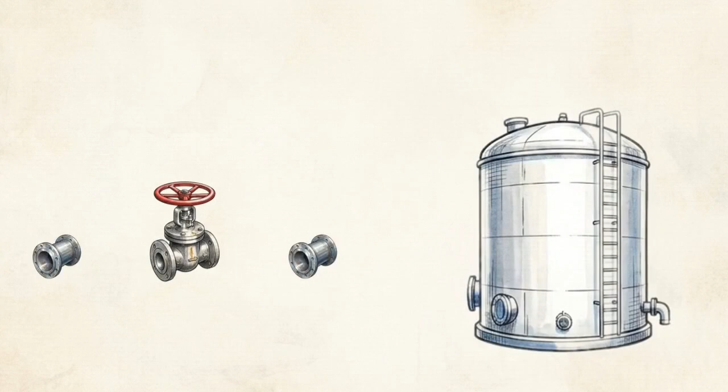Modern petrochemical facilities are vast, continuous systems. Thousands of gallons of volatile fluids move through these towers and piping every minute. To increase capacity, operators frequently need to integrate new infrastructure, like a massive crude oil storage tank or a heavy-duty pump, directly into the existing layout.

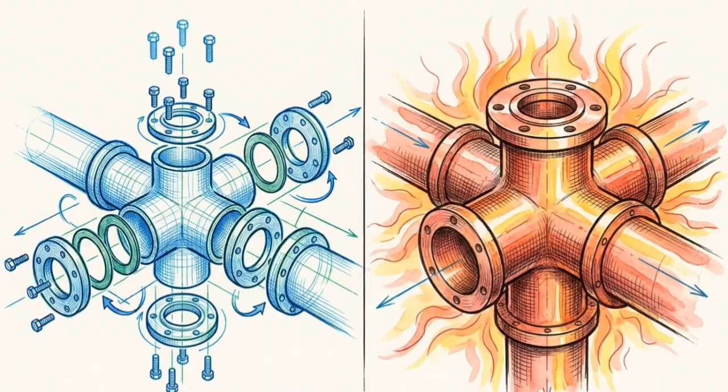The engineering challenge lies in permanently connecting this new, isolated piping to the live process system. This connection point is known as a tie-in. A tie-in represents the exact moment where the theoretical math of plant design meets the highly volatile physical reality of active chemical production. Inside an active pipeline, crude oil, natural gas, and toxic byproducts like hydrogen sulfide surge through the metal under intense pressure. Breaching that steel barrier without absolute control introduces an immediate ignition source to flammable hydrocarbons, or releases a lethal cloud of invisible gas.

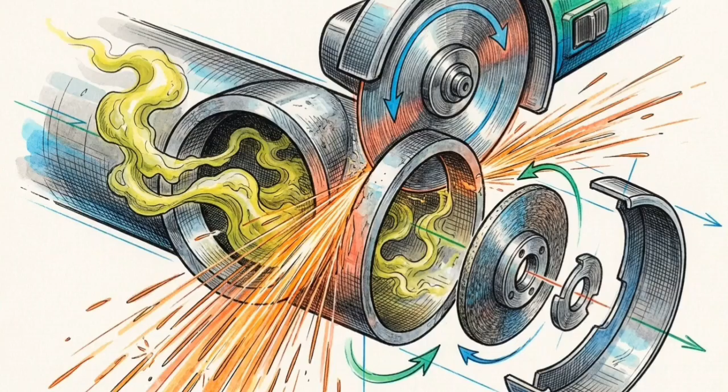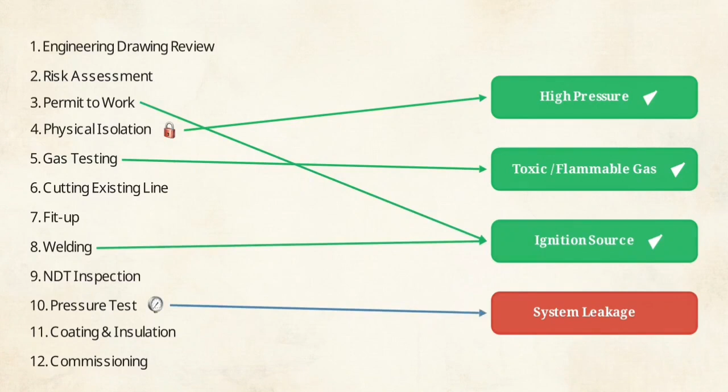The 12-step tie-in procedure is a sequential risk mitigation framework designed to systematically neutralize these specific hazards. Understanding a tie-in requires mapping each of these steps directly to the physical risks they are engineered to eliminate.

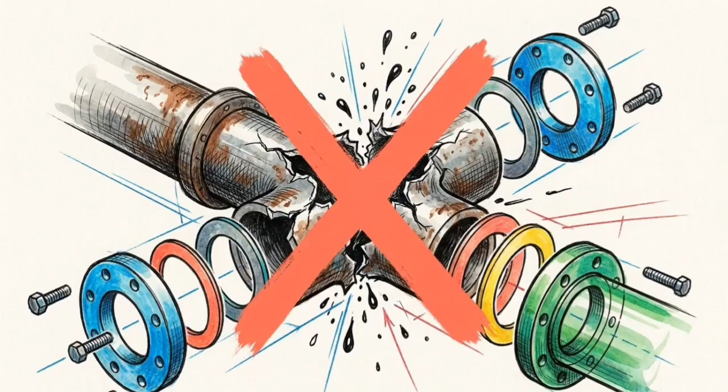Execution begins by verifying the exact line number on the engineering schematics. Misidentifying the target line is often a fatal, irreversible mistake. Accurate identification ensures the team is targeting a line that is prepared to be taken out of service.

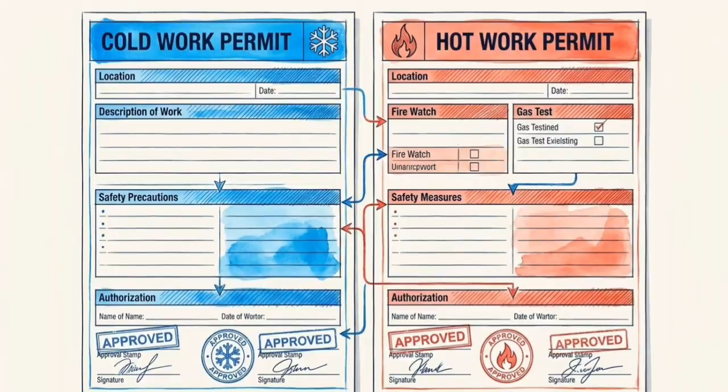Steps 2 and 3 involve the risk assessment and permits, where the job safety analysis translates engineering theory into operational safety rules. This requires a strict hierarchy of permits to work, specifically differentiating between cold work and higher-risk hot work permits. These documents provide theoretical isolation, identifying and neutralizing hazards before a tool ever touches the pipe.

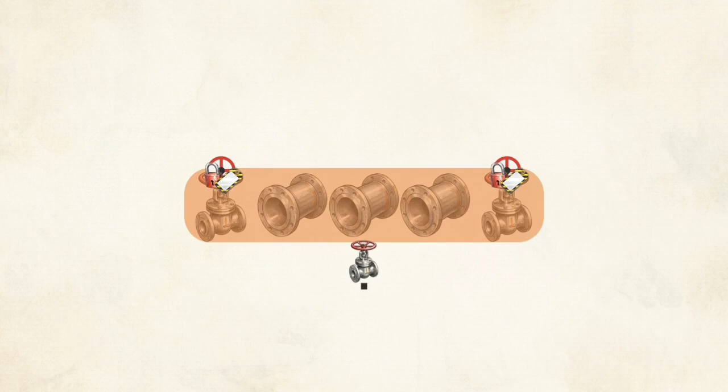Step 4 is physical isolation. Upstream and downstream valves slide shut, blocking product flow. Padlocks and warning tags lock onto the closed handles, providing a mechanical guarantee against accidental operation. The line is then depressurized. A drain valve opens to remove trapped product. Finally, venting clears out residual explosive gases until a gas-free certificate is issued. Full mechanical isolation is the absolute prerequisite that makes a volatile system a survivable workspace.

Step 5 requires continuous gas testing. Even on an isolated line, monitors must confirm that the explosive gas levels remain at 0%.

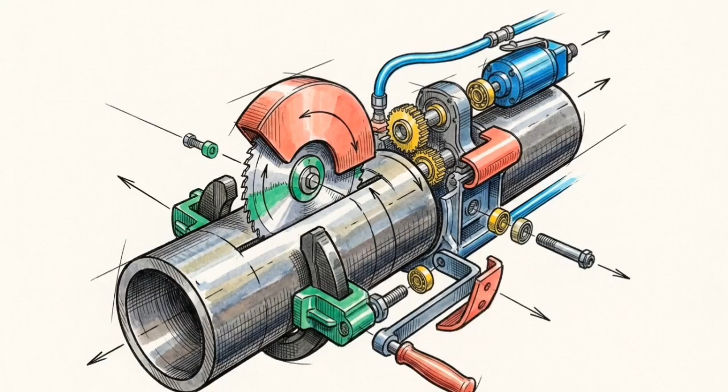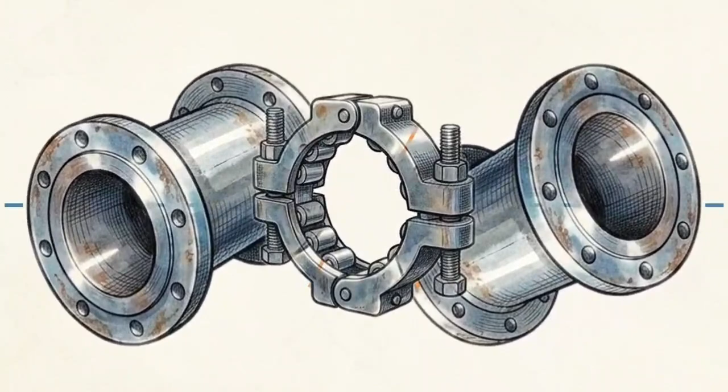Steps 6 and 7 cover the initial breach and fit-up. This involves cutting the line and the precision preparation of the pipe bevel. Alignment, clamping, and root gap spacing are critical here. The two sections must be perfectly positioned before the permanent joining can begin.

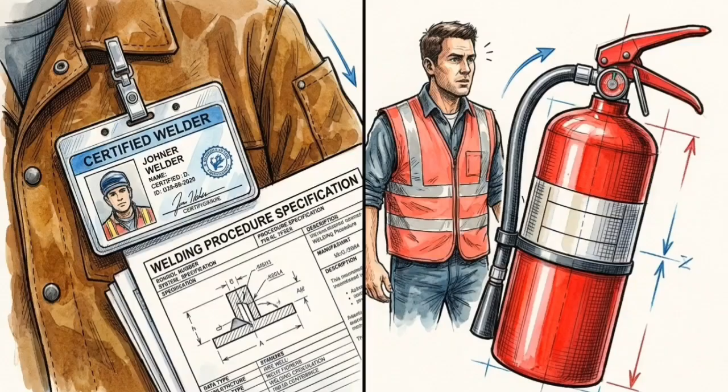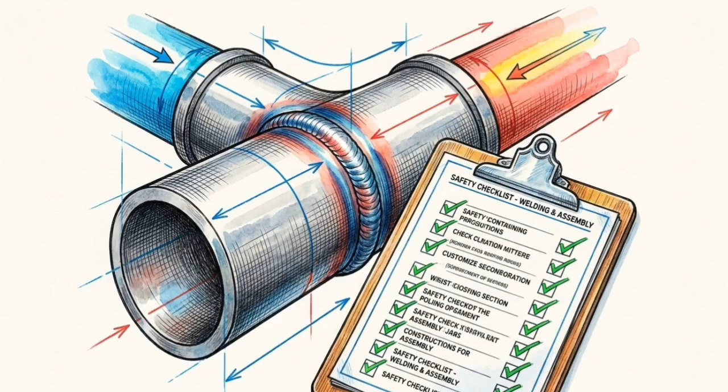Step 8 is welding. This is the phase of maximum vulnerability because it introduces a direct ignition source into the plant environment. To maintain safety, only certified welders using an approved welding procedure specification are permitted, supported by a dedicated firewatch. The safety of this weld depends entirely on the rigorous execution of the previous 7 steps.

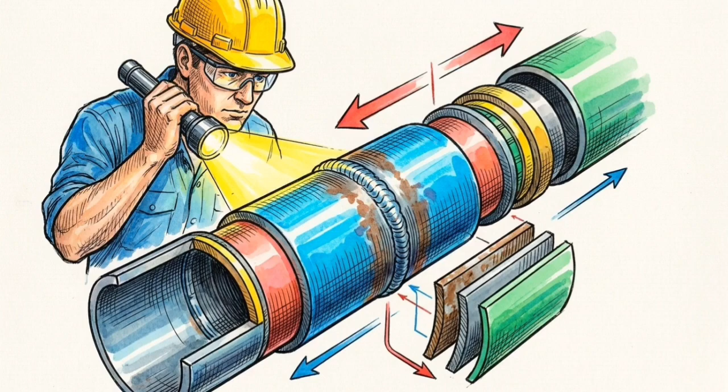In Step 9, standard visual inspection is insufficient. Structural integrity must be verified through non-destructive testing. Techniques like radiography or ultrasonic testing use high-frequency waves to inspect the internal, microscopic structure of the metal for flaws.

Step 10 is the hydro test. Hydrostatic pressure simulates operational loads to guarantee the new connection is leak-free.

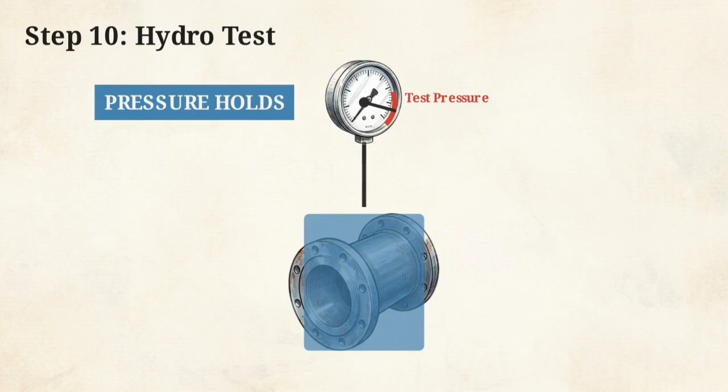The final steps complete the integration. After anti-corrosion painting, the locks are removed, the line is flushed, and pressure is normalized during commissioning. These final verification steps officially incorporate the new pipe as a permanent, load-bearing artery of the existing plant.

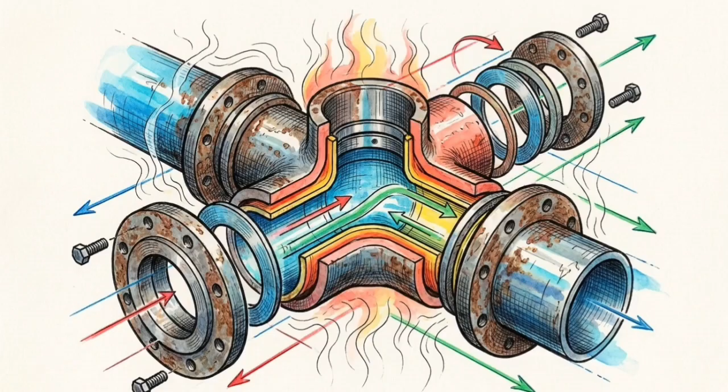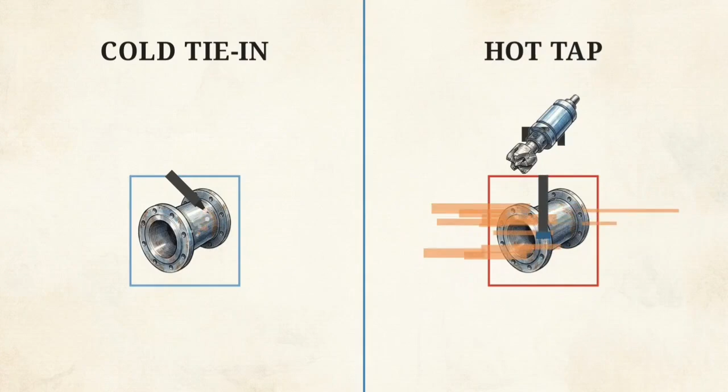This 12-step sequence represents a cold tie-in, which requires a full system shutdown and depressurization. When shutting down a critical pipeline is impossible, engineers utilize the hot tap as a necessary alternative. The mechanical reality of a hot tap involves drilling into a pressurized pipe without halting the flow of the product inside. This method carries a significantly higher risk profile and requires specialized equipment compared to a standard tie-in. The choice between cold and hot methodologies is a calculated trade-off between the economic cost of a shutdown and the operational risk of live-line work.

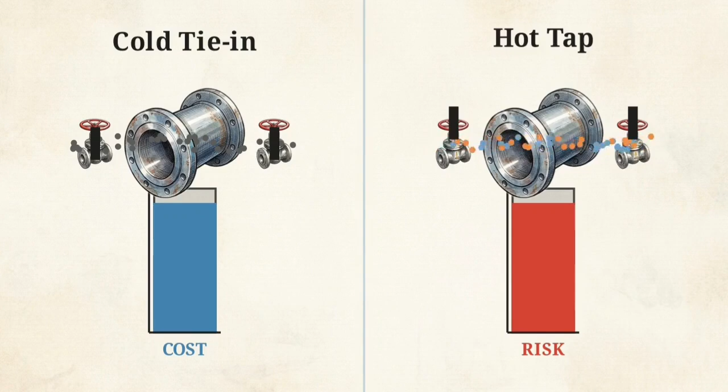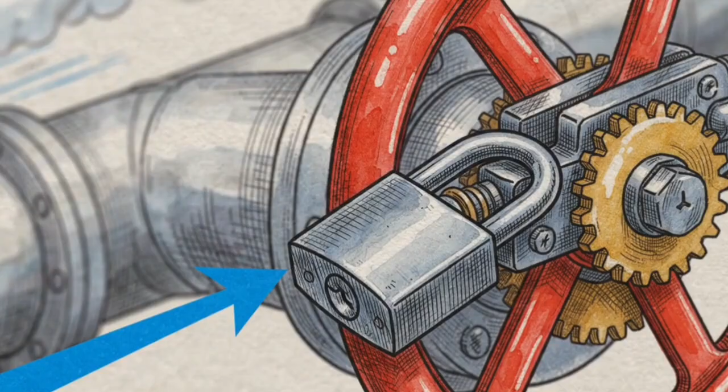A process plant exists as a balance of extreme physical forces. In this environment, safety functions as a precise sequence of applied mechanical controls. The tie-in procedure is the engineering framework that allows massive industrial infrastructure to grow, adapt, and expand without catastrophic failure.